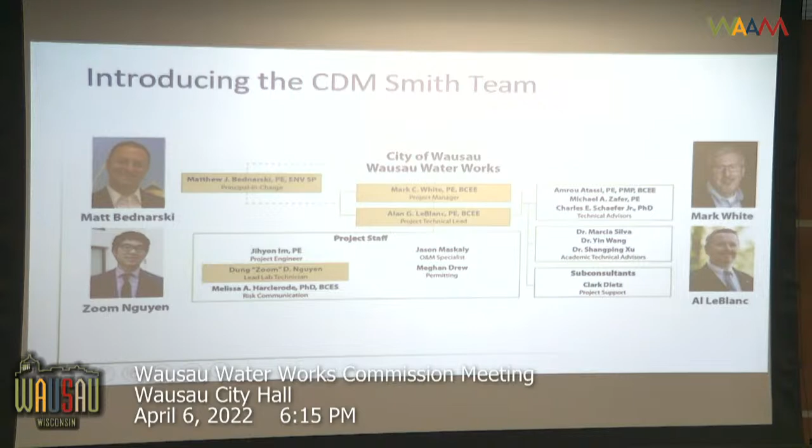What am I doing? This is actually the test here. I'm eating away at that 15 minutes here.

2022 is CDM Smith's 75th anniversary, and we grew up as a water firm working in water treatment, formed in 1947, and doing that from day one. We still do that. That makes up a big portion of our business today even. We've added many other things, but water is in our at our core and in our DNA.

I just wanted to point out that we have more than 100 staff in our region working on these projects, and that we've worked in dozens of communities in the Midwest and around the Great Lakes, including in Wausau.

So we're working in Wausau on your lead service line replacement program. We are a partner to Clark Dietz on that, who is on our team for this. And we are working on your corrosion control treatment study, which is integrally important to the PFAS study as well, as we need to make those water chemistries work together.

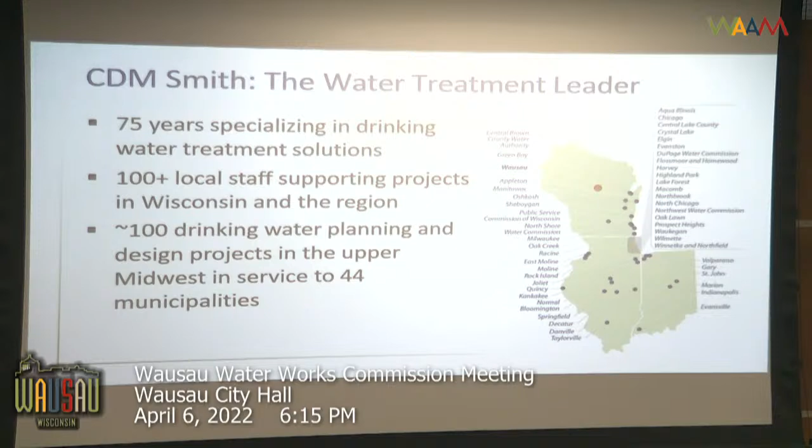Across the country, CDM Smith has almost 200 different PFAS projects, either water treatment or environmental projects, and we started working on these kinds of projects in 2007, prior to when it became an issue for drinking water utilities. It was more of an issue for our industrial clients across the country, and that's when we started working on these issues.

New England seems to be the heart of the starting point for the drinking water portion of this, and that is where our company is based. We're based in Boston, and many of the projects that you see on the map emanate there in New England. But as you can see, as states are creating those regulations, as we move west, we are working with those states as well.

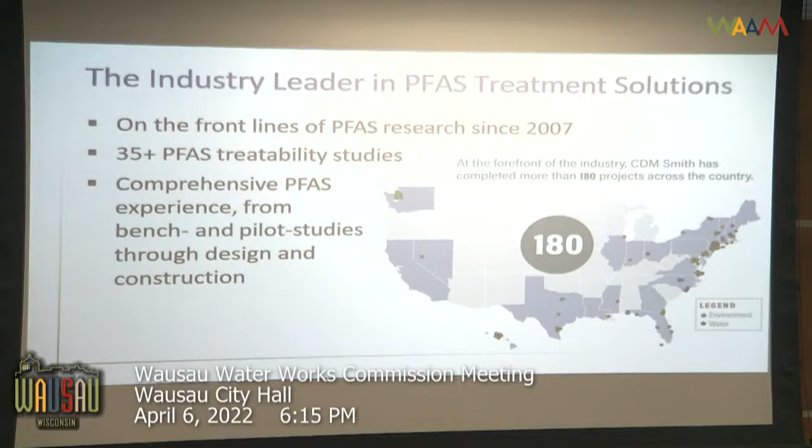So I'm going to turn it to Mark to go over some of the projects that we've worked on. All right, thank you. I'm just going to go through the next couple of slides, kind of present some of our experience and some projects that are similar to what you're experiencing.

First project here, it's in Massachusetts, and as Matt said, Massachusetts was one of the first states to come forward with regulating PFAS, and still has some of the most stringent PFAS regulations in the country. In this project in 2016, they found PFAS at elevated levels, 10 different compounds, over 300 parts per trillion. So CDM Smith was called in.

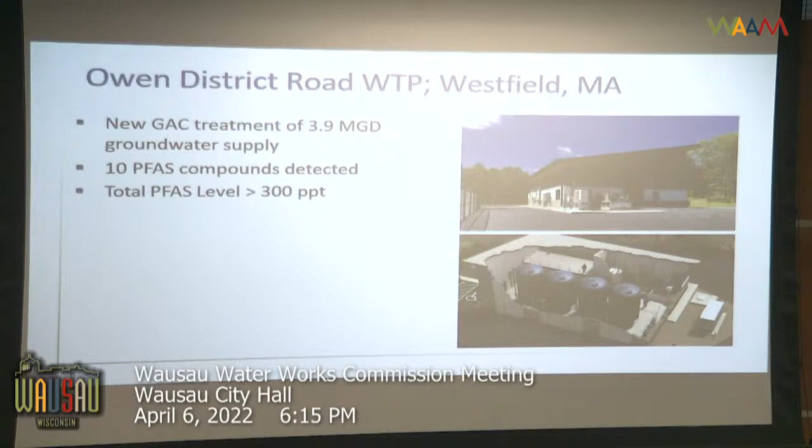We came out, kind of helped their facilities right next to an airport, and so we identified where the source was coming from, worked with them, took water samples and sent it to our laboratory, our treatability laboratory, so they were able to run side by side, small scale rapid column tests.

In such a way they could very quickly look at 2 or 3 different PFAS, or 2 or 3 different activated carbons to see which one is really best for this, because all carbons act a little bit differently, and each water is different. With that, we were able to see which are the carbons that work best, and then we were able to quickly design the new treatment facility, helped with construction phase services and startup and commissioning.

This went online in 2020. It treated over 400 million gallons have gone through the plant so far, and everything is coming out non-detect. This was the first full-scale potable drinking water treatment plant in Massachusetts.

We spent a lot of time working with regulators and trying to figure out what they were learning about PFAS, and trying to figure out how they were going to regulate this, and what type of analyses need to be done, and what type of monitoring needs to be done.

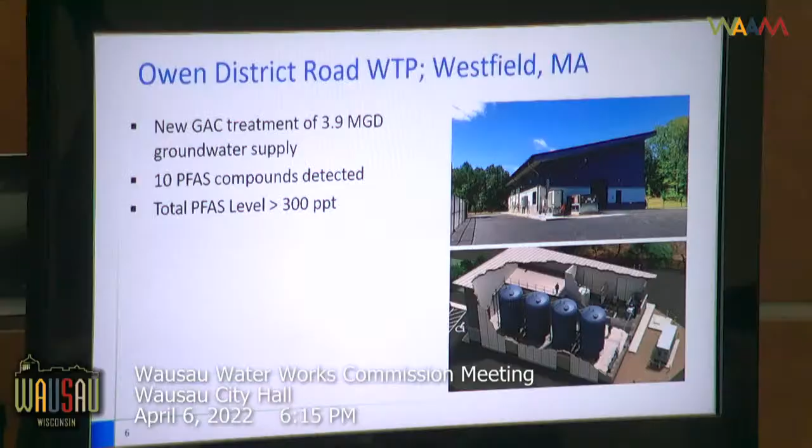Next project, not too far away, is in Ayer, Massachusetts. They identified PFAS also in 2016 at the Grove Pond facility. In that case, they had PFAS over 100 parts per trillion, with multiple contaminants.

So once again, we took samples, carboys of water, shipped them to our laboratory, who was then able to go through these treatability studies. In this case, we compared ion exchange as well, comparing different ion exchange resins and different carbon resins. With these small scale tests, you can get your results back very quickly.

They also looked at what happens if you put GAC and anion exchange in series, trying to figure out the best treatment for this facility. They found that ion exchange works best for this water, so CDM Smith designed the 2 MGD water plant, which went online in 2020, working closely with the state throughout the process. This is the first ion exchange PFAS treatment system in Massachusetts.

Then nearby, at Spectacle Pond, as the regulations kept going down, their levels were initially under the 70-part regulation Massachusetts first put forward, but then Massachusetts lowered that to 20 parts, so suddenly this facility was out of compliance. We've been working with them, and again it's on the same aquifer, but we shipped the water out for treatment studies, and in this case we found GAC actually worked better for this water. So you really need to look at each water individually. This project was designed and is a couple of months away from construction.

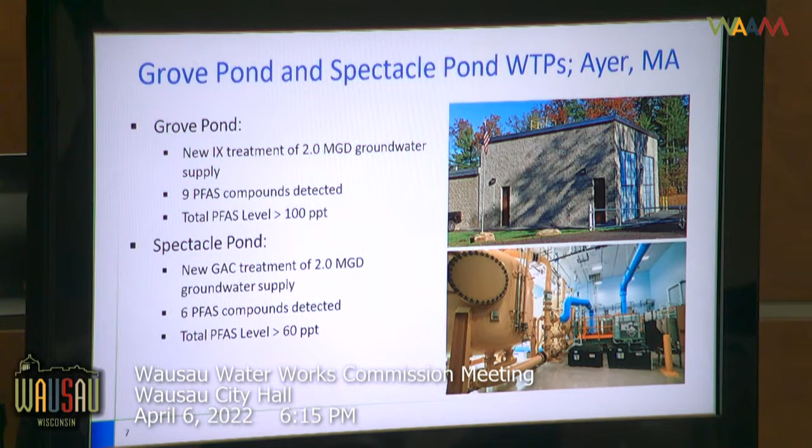Finally, just to touch on bench scale testing - Matt mentioned our laboratory, and Zoom's on the call, who kind of heads up our treatability studies. This lab has done over 35 treatment studies focused on drinking water, where we've been able to ship the water out there. In the top photo you see all these small columns on the wall, small rapid scale columns with media inside them.

Traditionally, this has been very useful for granular activated carbon. Over a couple of weeks, or several weeks, you can get results that would take months or over a year on a pilot scale. We can evaluate these, and we've actually shown and come up with methods where we can do the same thing with ion exchange.

So we can look at different ion exchange resins, different carbons, and how they react in series or together. Because it's in a laboratory setting, we can control for cross-contamination, making sure your results are reliable.

We need to look at not just your target contaminants - you can see there are 2 resins on the graph, and on the bottom are all the different PFAS species. Two of those, PFOA and PFOS, are showing zero concentration, so both resins met the regulatory requirements and would treat the water. But if we look at the non-regulated contaminants, resin 2 was doing much better.

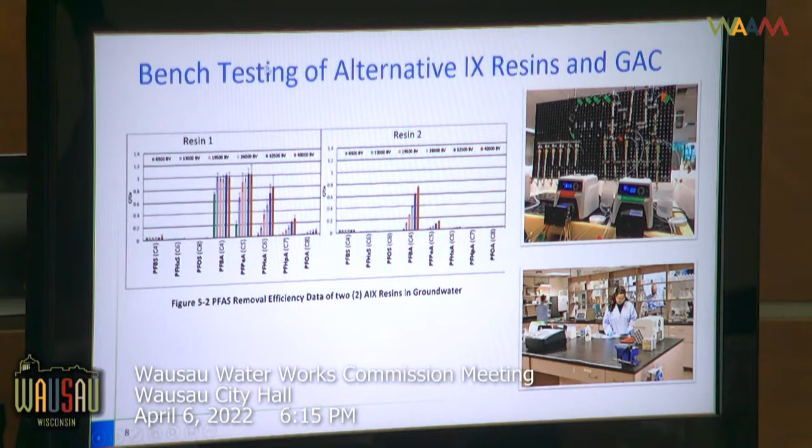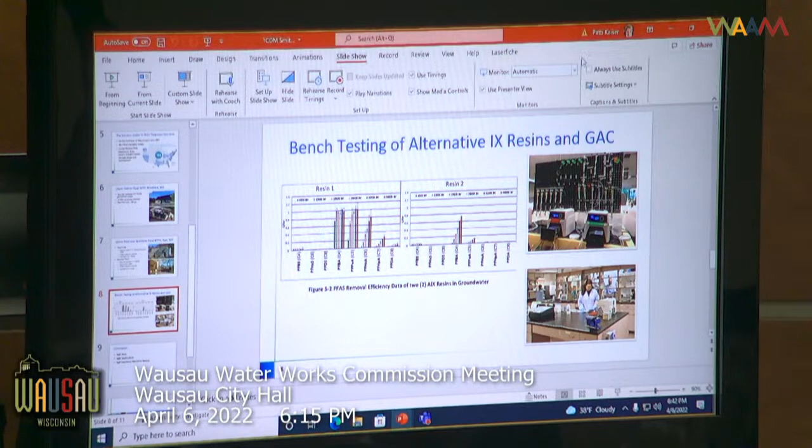Sure, Mark, and I think you're spot on. We're testing 40 plus waters from all across the country, some groundwater, some surface water, and we notice a lot of trends. Things like bulk contaminants, chloride, solvents, even at trace level, can impact GAC performance and longevity. And you mentioned the high organic content present at the site here, and we notice that high organic content, even just 1 to 3 milligrams per liter, can adversely impact both the resin and GAC performance and really longevity. So, doing some bench testing, what we always call 'penny on the dollar' type testing, can get you really good, reliable data within a very reasonable time frame. This testing really can take weeks instead of months to get good results.

Thanks, Mark. Thanks, Zoom. Just wanted to leave you in conclusion here that CDM Smith has pulled together the right team for this review project that you have put forward. One team member I failed to mention is our risk communications professional, Mel Harclerode. She is working on communicating risks on PFAS and lead services all across the country. I know that your communication with your public has been very transparent and out in front. It's very important to you, and that's very clear from everything I've seen over the last 4 months. As you move forward through that, we can help provide some more content for that as well.

As you heard from Mark, we have the right qualifications. We've been working on this since 2007 and continue to grow our experience and our resume in this field. And finally, we have the right experience relevant to Wausau, and again, that's really focused on water chemistry and the CCT study. Thank you.

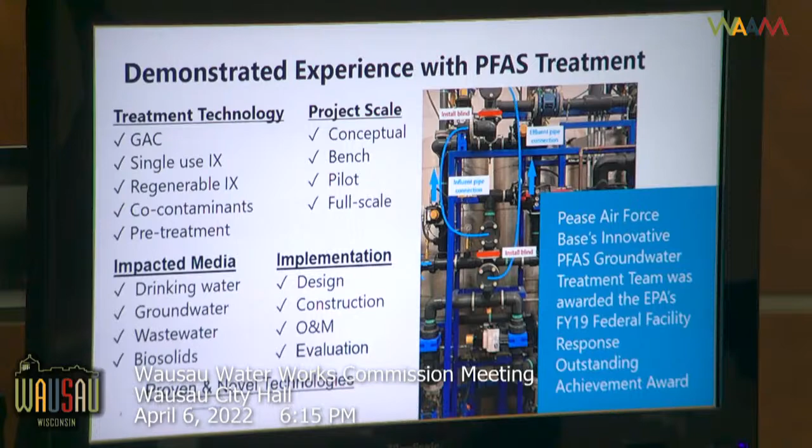As part of developing these specialized treatment systems, we look at treatability studies to help optimize these systems. Wood has 3 fully equipped treatability labs in San Diego, Atlanta, and Cambridge, Ontario. These labs help optimize treatment systems, not just at the front end when the system is being designed, but throughout the project lifecycle, evaluating new technologies like GAC and ion exchange.

One example project where we've used a treatability lab is a landfill project in central Michigan with PFAS contaminated groundwater. Our project team developed a full-scale treatment system there from the consulting and engineering side. We developed both bench and on-site column tests to expedite the design, then supported procurement and construction. It consists of 3 ion exchange vessels to treat the PFAS, plus an air stripper for VOCs on site. The team used treatability studies to optimize that system.

Wood is also involved in research and development within the PFAS world, with more than $3 million on contract right now to develop treatment and destruction technologies. Our team is very familiar with R&D, and we have a number of peer-reviewed articles that support the development of these treatment and destruction technologies.

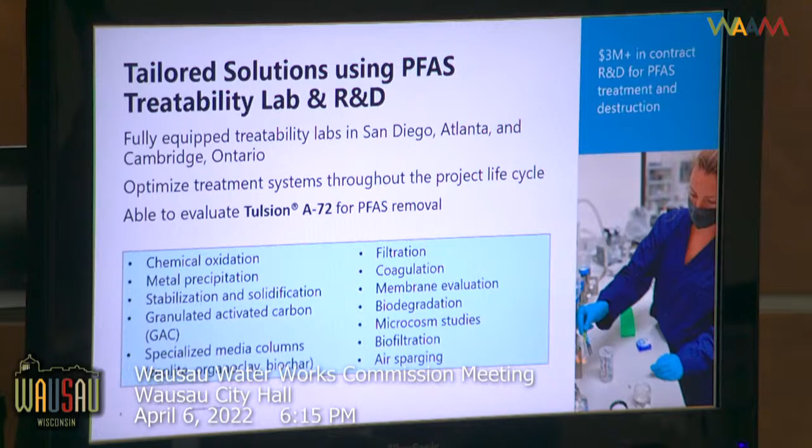As a leader in PFAS, Wood is always trying to look forward and anticipate what might come down the pike. We expect that PFAS destruction will become an important component. If we take a step back, treatment is really the idea of separating and concentrating PFAS out of source water and then destroying or disposing of that material.

We know that the US EPA's recent roadmap for PFAS states they plan to classify PFAS as a hazardous substance later this year. When that happens, costs for disposal are likely going to go up, and the logistics of handling that waste will also become a potential challenge. Our team recognizes that treatment systems as a whole are never static and will need to adapt and evolve to both the changing regulatory environment and the changing technologies as they advance and improve.

All right, so with that, I'm going to hand it over to Hannah, who's going to introduce the East Metro project in Minnesota, where we've provided strategic consulting to the state on their PFAS issues.

Thanks, Evan. That was a great summary of Wood's PFAS expertise. I just want to recognize the team here. Evan brings the Wisconsin perspective to our team, and we've got Dave here representing our global consulting expertise. I'm here to talk about one project that I think is a great example of how we've used that expertise.

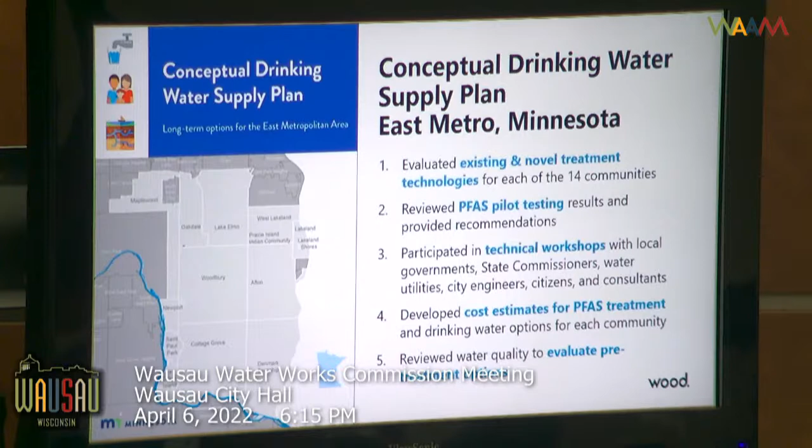Specifically in providing that technical advisor role: the state of Minnesota, for those unfamiliar with the situation, sued 3M company for contamination impacting 14 communities, shown on the map on the cover page of the Conceptual Drinking Water Supply Plan. We were brought in after the settlement was reached in 2018 for $850 million.

The state went ahead after that settlement and put together work groups. Those work groups met on a monthly basis. Do I need to pause? Are there technical difficulties again? Can you hear us? Okay, good. We don't know what's happening here.

So the state brought us in after those work groups had started meeting monthly because they recognized there was a need for a PFAS expert, and we already had experience with the state, so they brought us in that capacity.

We immediately began meeting with the communities and starting to develop the plan. What we brought to those 14 communities, about 170,000 residents in total across a large area of 150 square miles, was our role as not only PFAS experts but also in looking at a conceptual water supply system, taking into consideration all the different communities and what their water supplies currently look like and what they might look like in the future.

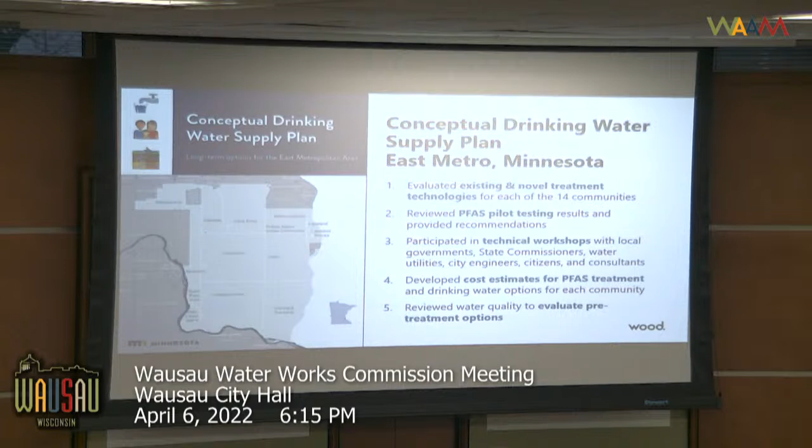So we did that technical legwork, and part of that also included reviewing technical components, such as some of the communities doing pilot studies as well. So we did review of those pilot studies and provided technical feedback to help make those the best that they could be.

We continue to engage with the communities after the plan. The plan was released last year, 2021, and since then we've been working with the state to review all the plans coming in and make sure that the funds are being used according to the plan that we put together.

I just wanted to emphasize that throughout that process, we've been working as a team within Wood, and I've been working personally with all of these experts throughout this process. I think one of the things is just having those experts accessible and ready to answer any questions that might come up. So hopefully that gives you a little bit of insight in how we can help the city of Wausau and provide that technical advisory and specific PFAS experience for you all.

And I'll turn it back to Evan. All right, well, thanks, Hannah. So that concludes our presentation. We do have some information after this with recent publications, some of our recent examples of work, but otherwise we're happy to take any questions that you might have on those or really anything related to our PFAS qualifications.

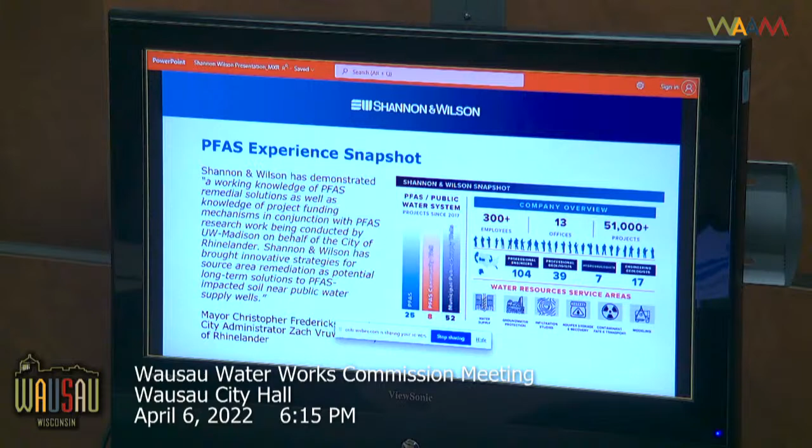Shannon and Wilson are also active members of the Wisconsin Rural Water Association. We have submitted a paper on PFAS community project management and planning for a presentation at the American Water Works Association Wisconsin Chapter's annual conference this September.

Our project approach is focused on the most critical parameter: the protection of human health, a basic fundamental concern that requires immediate attention and corrective action. We understand the importance of the City of Wausau and the Wausau Water Works' ability to provide safe drinking water to its residents. Shannon and Wilson recognizes the need for reducing and removing PFAS from the city water supply as an appropriate immediate response to the concentrations of PFAS detected in all 6 municipal water wells above DNR health advisory limits.

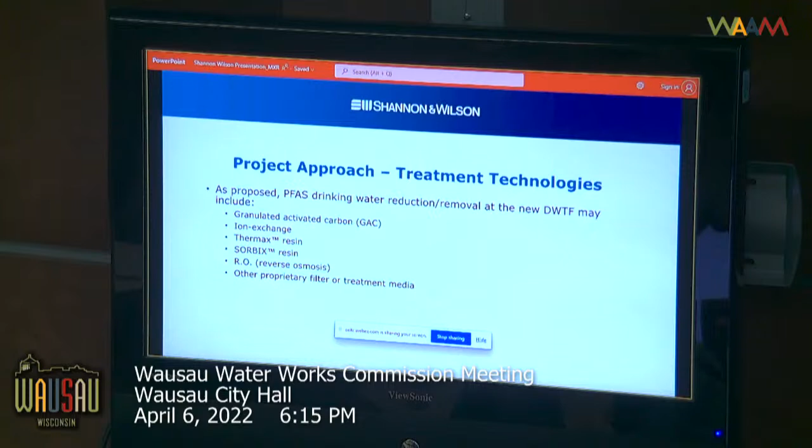As proposed, the drinking water treatments include a variety of existing and developing technologies, including granulated activated carbon (GAC), ion exchange, Thermax resin, Sorbix resin, reverse osmosis, and other proprietary filter or treatment media. That said, PFAS are hard to treat. PFAS are everywhere, with potential sources existing in groundwater, surface water, soil, and even in the air.

So as proposed, our project approach warrants a review of all treatment media and even more options that are available through a number of contractors that specialize in drinking water treatment systems. Because the new drinking water treatment facility is so far along in its construction stage, with an August 2022 proposed startup, it may be more cost effective to have existing engineering firms Donohue and Becher Hoppe contract directly with a drinking water treatment firm to complete the bench scale testing and add treatment trains to achieve the initial goals of PFAS reduction at the facility. As part of our project management, Shannon Wilson can facilitate the water treatment contractor selection process.

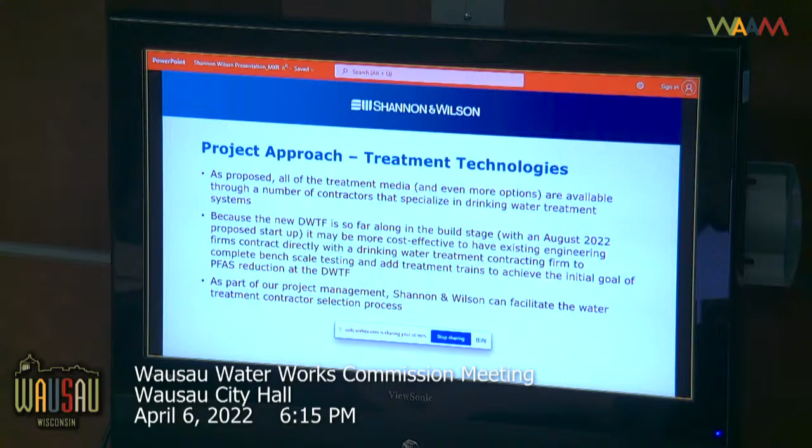Shannon Wilson's approach to the City of Wausau's PFAS drinking water issue is a long-term solution to Wausau's water problems, involving defining the nature and extent of PFAS impacts in soil and groundwater, as well as devising a well-field protection strategy. It is not economically feasible to treat Wausau drinking water for PFAS into perpetuity.

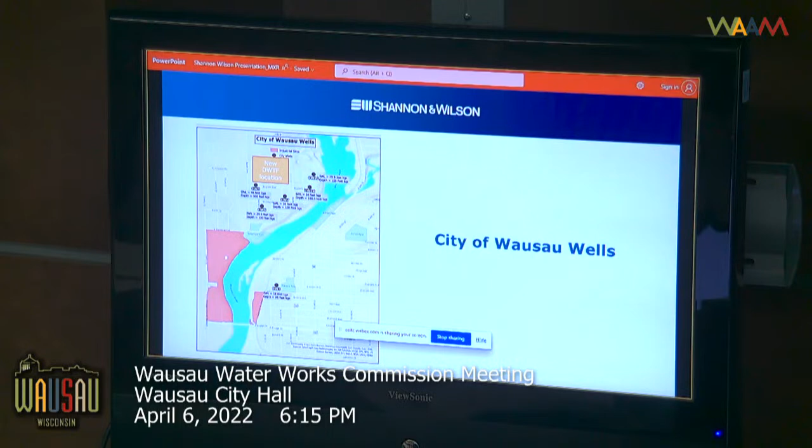This map shows the locations of the 6 wells impacted by PFAS. We've also provided a summary table identifying the well locations, the pump capacity, volume extracted in 2021, dates installed, total depth, the geology where the water is coming from, the source water itself, and the results of the PFAS sampling completed in 2019 and 2022.

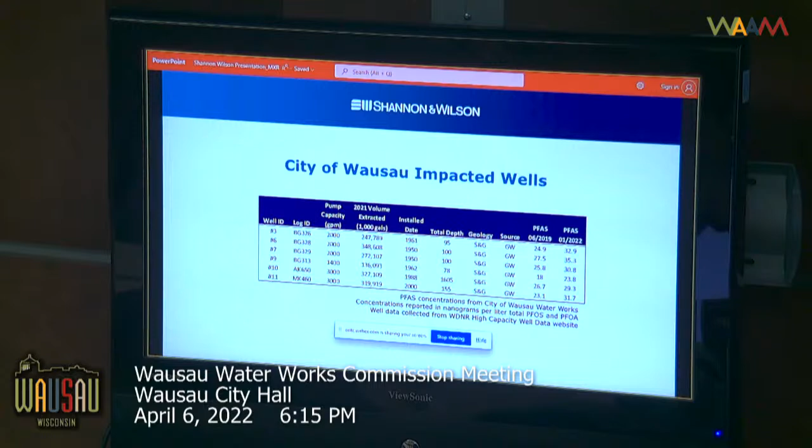As a Wisconsin company, Shannon Wilson has partnered and funded PFAS research with the University of Wisconsin-Madison's Environmental Engineering Department to investigate the closure of 2 of the 5 City of Rhinelander municipal wells due to EPA health advisory drinking water exceedances. These wells were located near possible sources of PFAS contamination, including firefighting foam, municipal sludge management areas, and solid waste landfills.

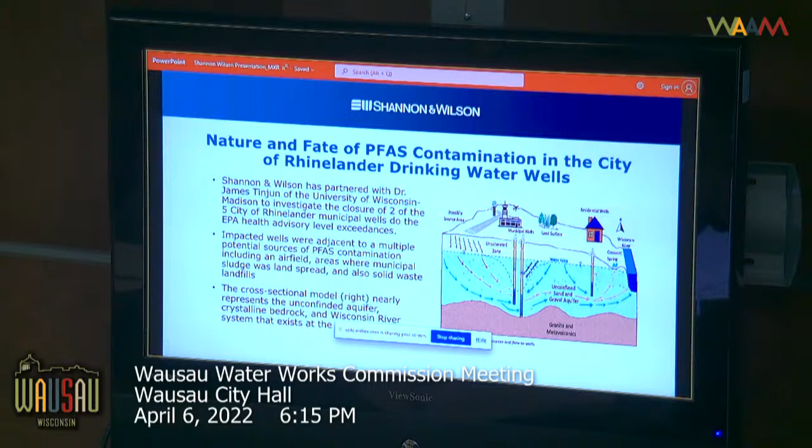Coincidentally, with the exception of the suspected source areas, the cross-sectional model provided here is similar to the well field configuration for the City of Wausau: a highly permeable sand and gravel aquifer, shallow high-capacity wells, crystalline bedrock, and a hydraulic connection to the Wisconsin River. Our field research completed for the City of Rhinelander includes sampling PFAS in soil and groundwater, geophysical investigations used to evaluate the aquifer characteristics, and PFAS fingerprinting to analyze and link PFAS sources to PFAS in groundwater.

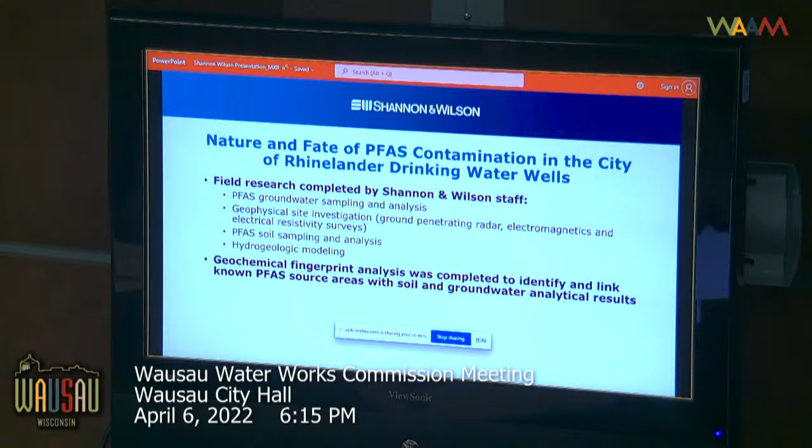At this time, I'd like to introduce Kristen Freiburger, again, senior chemist and PFAS subject expert, to talk about some of her project work.

As Mark mentioned, my name is Kristen Freiburger. I am the environmental group lead in our Fairbanks, Alaska office, and I have personally been working on PFAS projects for over 8 years. Shannon Wilson has been working on PFAS projects with several different clients throughout the years, but our largest set of projects is on a 15-year contract that we won with the Department of Transportation here in Alaska. As part of that contract, we are investigating 30 different airports where AFFF has been used. I'm going to highlight a couple of those projects in these next slides.

One site that is part of our work with DOT is the Fairbanks International Airport. Our client detected PFAS in several wells on site during an investigation, and since the groundwater in this area is known to flow towards private wells, DOT contacted Shannon and Wilson, and we quickly mobilized to collect samples from the private wells near this airport.

This map shows the results of those samples. Red indicates locations where PFAS concentrations exceed the EPA LHA, or 70 parts per trillion for PFOS and PFOA combined. These homes have since been hooked up to a municipal water system as a long-term water solution for their home needs.

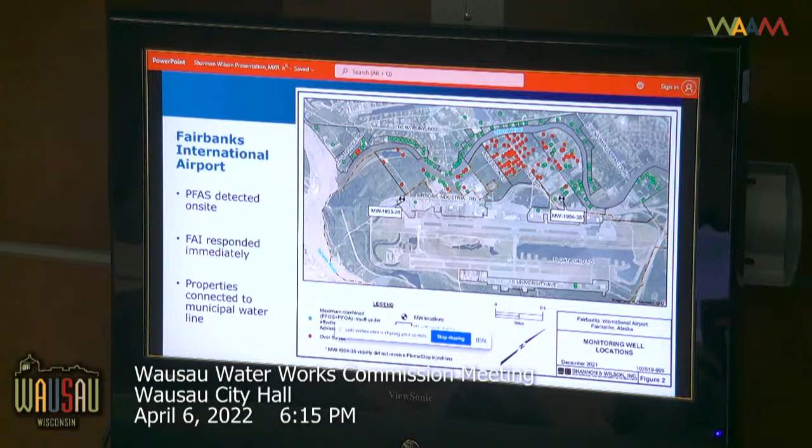At the Fairbanks International Airport, we also completed a pilot study to investigate the effectiveness of PlumeStop for sequestering PFAS. PlumeStop is a colloidal activated carbon that's injected into the ground. We did this in an area known to have high levels of PFAS contamination, and the material was formulated to sequester 5 PFAS compounds: PFOS, PFOA, PFHpA, PFHxS, and PFNA. This work was completed in partnership with our client, DOT, and also the manufacturer, Regenesis.

Ongoing monitoring has occurred for almost 2 years, and during our last sampling event at the end of that 2-year period, the 5 PFAS compounds the material was designed for were not detected. We're currently investigating how this technology can be used at several of our sites that are part of our DOT contract.

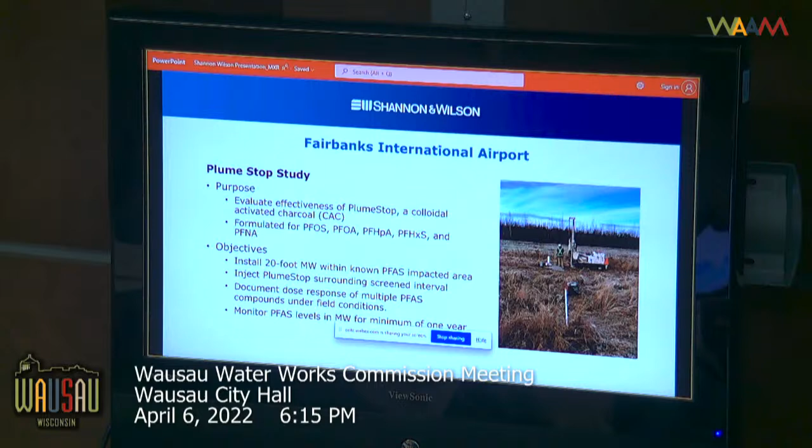Another airport that is part of our DOT contract is the Gustavus Airport, located in southeast Alaska. Our project kicked off with a well-attended public meeting in 2018. At that meeting, we informed the public about the contamination in the area and scheduled appointments. This project has also included installation of a point of entry treatment system at the Gustavus Inn.

That system uses GAC, and after two years of monitoring, PFAS are still not detected in that system. It also includes the removal of arsenic, which remains non-detected to date as well. We are currently investigating additional remedial options for soil and groundwater contamination in this area, and connecting homes to rain catchment cisterns, and also installing a public well for supplemental purposes for those cisterns during dry periods.

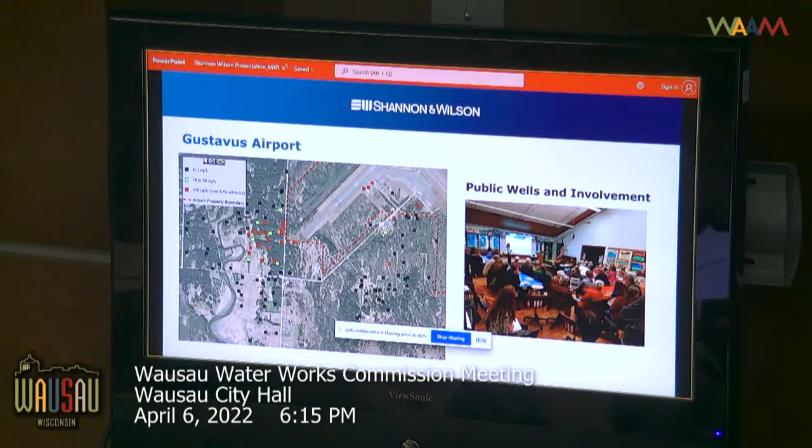As we move forward, Shannon and Wilson have identified a number of project funding mechanisms available for the investigation and remediation of PFAS in soil and groundwater, as well as a number of grants and loans available for infrastructure improvements for water systems impacted by PFAS. As of March 18th at the Wisconsin Rural Water Association Conference, the DNR is still waiting for the EPA to determine the vehicle for providing the funds for these projects.

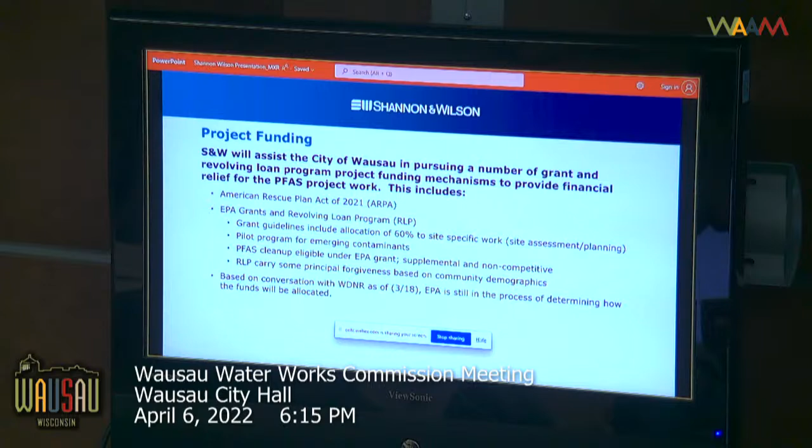ORIN Technologies is our teaming partner, and they have experience using a variety of chemical reagents, biological, organic, and inorganic, to break down PFAS in soil, groundwater, sludge, and even in firefighting foam, which is the major source of PFAS impacts to soil and groundwater. ORIN is currently working with the DNR on a number of pilot studies at a major airport in south central Wisconsin. ORIN would be providing these same technologies to the city of Wausau's PFAS projects.

As an approach to addressing the immediate health and safety concerns for the city of Wausau, Shannon Wilson recommends that the city of Wausau, the water department, Becher-Hoppe, and Donohue, with the assistance of Shannon and Wilson, identify a specialized water treatment contractor to provide the appropriate media and treatment trains to achieve the goals of providing safe drinking water to their constituents. Services completed by the selected drinking water specialists would include an evaluation of the available treatment technologies and contingency planning based on future potential EPA health advisory standards.

Concurrent with the upgrades to the drinking water treatment facility for PFAS reduction and removal, Shannon and Wilson proposes to evaluate and inspect the existing wells, complete a well field assessment including groundwater capture modeling to determine source areas impacting the existing well field, assess considerations for well field development including well relocation, exploring non-PFAS impacted areas for sources of community water, and provide remedial solutions that have been successful at other locations in reducing PFAS in soil and groundwater before the groundwater gets to the drinking water treatment facility.

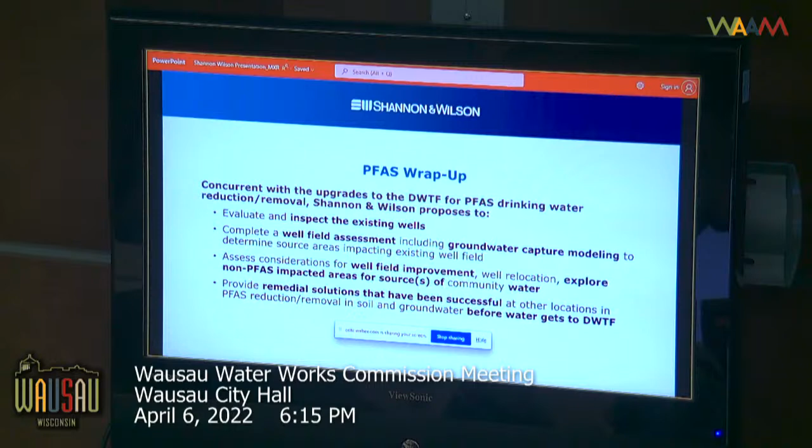While the city of Wausau and the water treatment facility have a desire to immediately address the public water system, the existence of private wells used by the community outside of the service area may be another consideration. It would be important for the city to provide clean water for the majority of Wausau residents outside of the current service area, which would add additional ratepayers into the system. Expanding and seeking other sources of community water outside of the current well field may also provide the capacity needed for this expansion, and well field expansion may also be used to blend down PFAS impacted water at concentrations below regulatory health advisory standards. Funding is also anticipated for these system upgrades and assessments.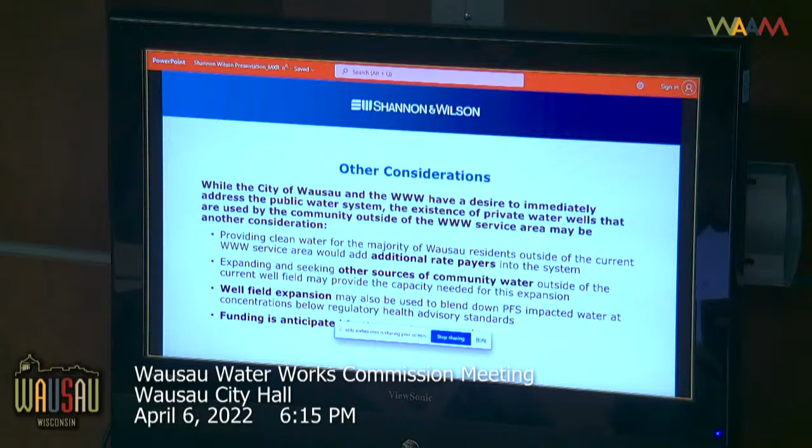We appreciate the time and your consideration, and look forward to your decision on moving forward with this project. Thank you.

Okay, so I'm unmuted for some questions and answers if you have questions for me. They're completely virtual, right? But they're not. All right, thank you. I guess we are moving on to... the life cycle cost? So I think we're going to have to send them the questions via email since this was a virtual presentation, or a pre-recorded presentation.

Life cycle question for the treatment systems, that's for the service providers that provide the treatment trains and some of the other consultants that will be presenting their technologies today. Our proposal is really about wellhead protection and making sure that the water you're bringing into the system isn't impacted to begin with. So we decided to take a bit of a different approach, which was actually part of the RFP response.

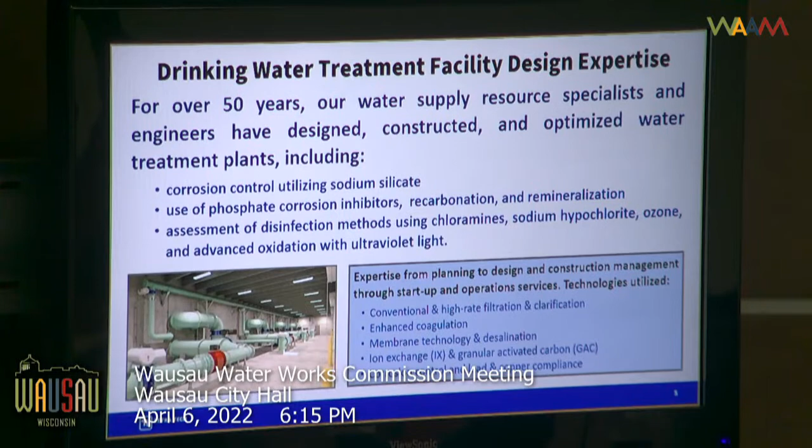And that's due in part to the long history of our drinking water treatment facility design expertise, which includes the traditional considerations of disinfection methods as well as corrosion control and other treatment methods. And that goes for wastewater as well. We have an extensive history of wastewater treatment design.

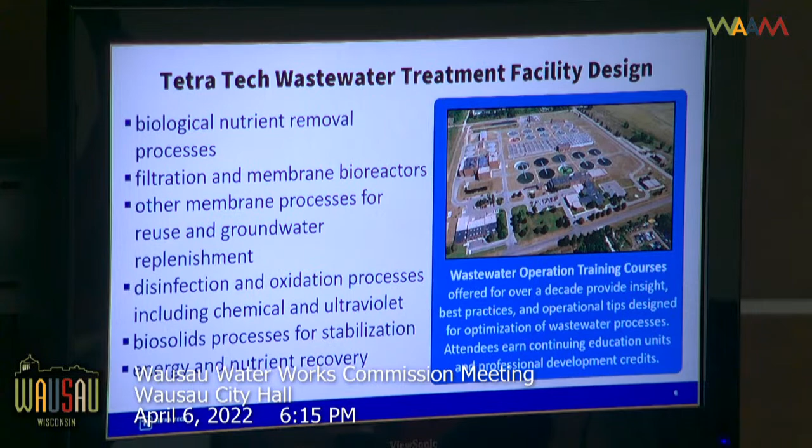One noteworthy point in that regard is that for over 10 years, we've offered wastewater operator training courses for which attendees can earn continuing education units and professional credits. I'm going to quickly go through some slides showing our projects across the globe and through the U.S.

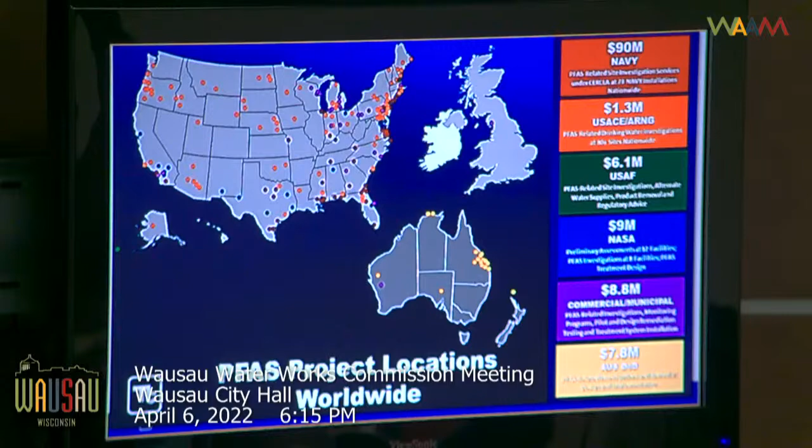The first slide shows projects across the globe, including Australia, which is the place where a lot of innovation first started with PFAS treatment. And then the U.S. map shows a lot of our projects that were completed for DoD clients, but then also commercial, municipal, and industrial clients as well. They involve partnerships with evaluation of treatment technologies with the DoD and also universities.

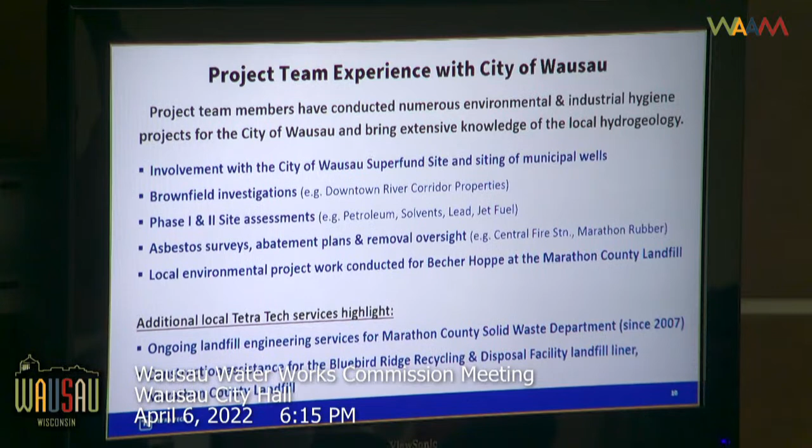Thanks. Might have to erase this a little bit. All right, good job, Marshall. All right, yeah, I'm Jamie Dixon with Tetra Tech.

We know the important thing here is you guys got to protect your drinking water up front. So we looked at only NSF certified type technologies that have been approved by other places for drinking water, which include reverse osmosis, granular activated carbon, which everyone's talked about, and ion exchange. So we're really focused on those, and we've done pilot studies and other things in the past.

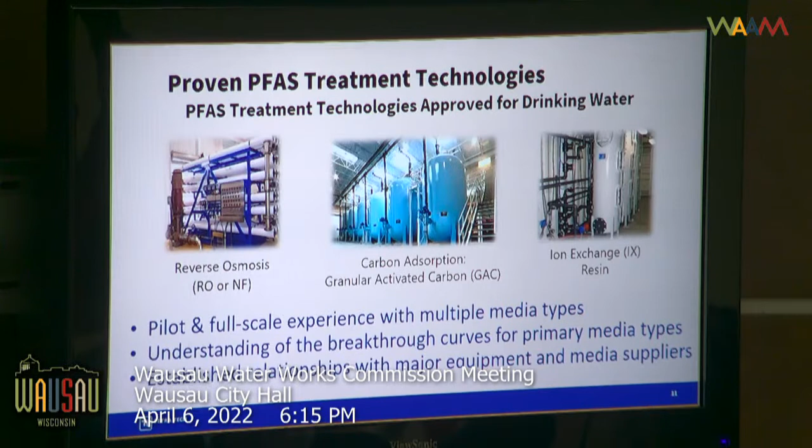I wanted to go through this and get some ideas of what's what, so that you can see. I've reviewed your system that I could find available online, and your new water treatment plant that you built is about 4.8 million gallons per day, or about 3,330 gallons a minute. The max peak stuff is about 9 million gallons per day, which is about 6,250 gallons per minute. So this range of system flow rates we need to deal with would be in that range.

You've got the TOC and iron manganese issues. You've got wells 3 and 6, which we've talked about earlier, that have impacts with VOCs. Even though they're below the MCLs, they're still above the cleanup criteria the last I looked. So those need to be maintained and operated, and I understand they operate one at a time so that there's always a net draw from those areas. The remaining wells are about 2,230 to 5,150 gallons a minute, depending on the configuration to meet those peak flows.

So ideally, based on all the stuff we looked at, the thing would be to stop the PFAS from getting into the new treatment plant, since it's not contaminated now, and we wouldn't want to contaminate it to start with. So what we've looked through, we identified it would be great to put a pretreatment in, and where would make the most sense to do that.

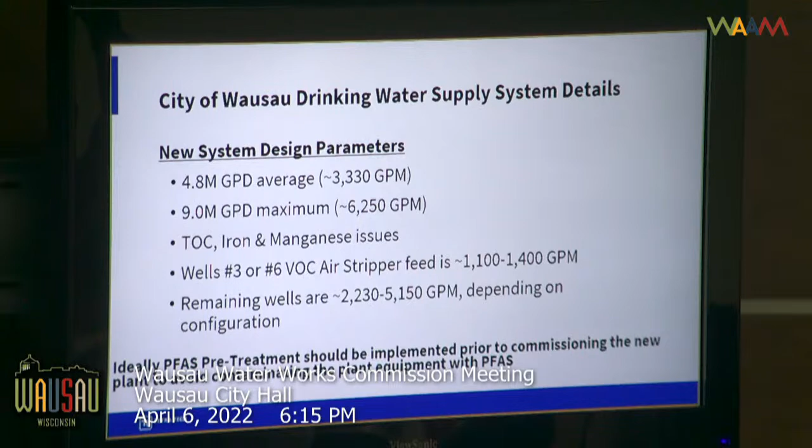Looking at your publicly available documents, we find you've got 3 and 6 that are feeding to the air strippers, which are being built there right now for your pretreatment for wells 3 and 6. And that's a separate manifold of 18-inch ductile iron versus the 30-inch ductile iron coming in from the remaining wells. So since you have those wells in that place right on the front end of your plant, we might have some footprint where we could put a pretreatment system before we hit the actual plant and start to contaminate it.

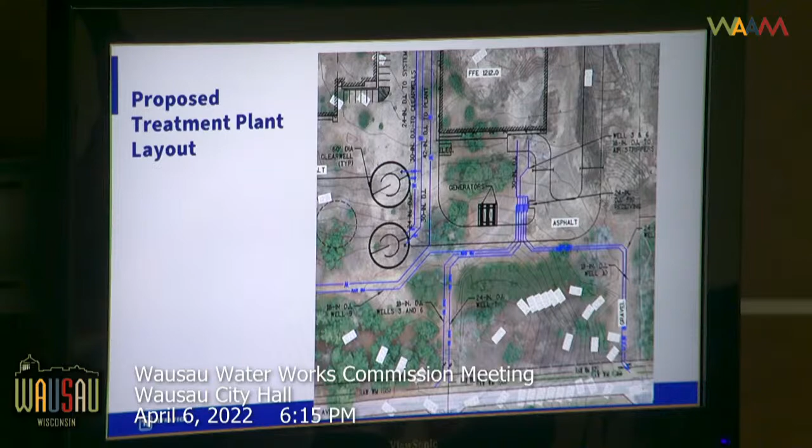The reason I'm really concerned about that is you have a lot of things in it. The sludge is going to go someplace. You're going to have PFAS in the sludge, which was mentioned before. On top of it, your filters have anthracite, which is a carbon. It's going to load up on that, and it'll be released once you start cleaning it. So you've got issues on the back end and the front end. I think the best solution we see based on the pilot output is to pre-treat it.

So let me just go through a couple of these technologies quickly. Reverse osmosis, high pressure through a membrane, filters out all the PFAS, it concentrates in the brine, and you got to dispose of the brines there. We still have the same issue we have other places. We've done this at a lot of Air National Guard bases, smaller communities. They're pretty cost effective for small units, but probably too much for this size, even though it's been done other places, but I think it's not the option we want to look at.

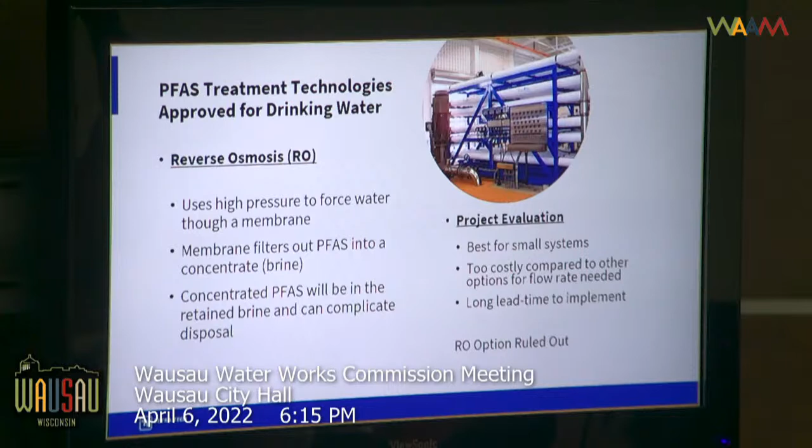Then granular activated carbon was the first on the scene that was used a lot of places. It has a very large empty bed contact time to meet the same removal proficiencies that you have for resin. Therefore, you have to have very large vessels. You need a huge footprint, and it's usually about 3 times the size of an ion exchange option. So double to triple the footprint, large capital investment because the size of the vessels is so much bigger.

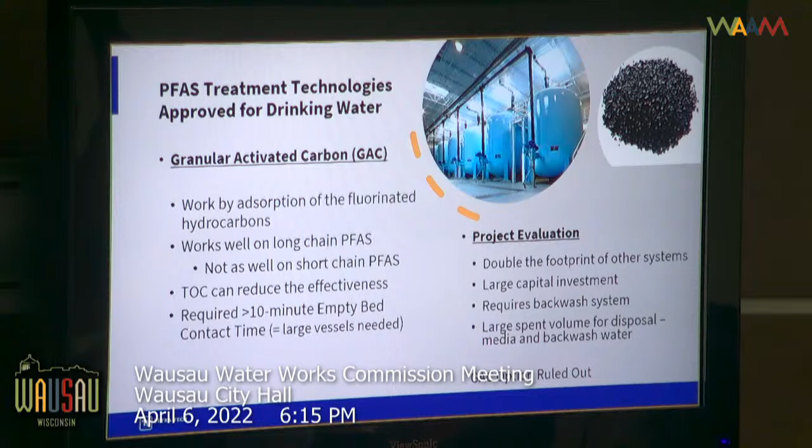GAC requires a backwash system because the media tends to plug up, and if you're backwashing it, there's another source of PFAS coming off the GAC that you have to deal with. There's also large media volume spent for disposal, so if you have to haul it out west, the larger the volume, the more it costs. That tends to be an issue, so we ruled out GAC as an option based on the pilot study results.

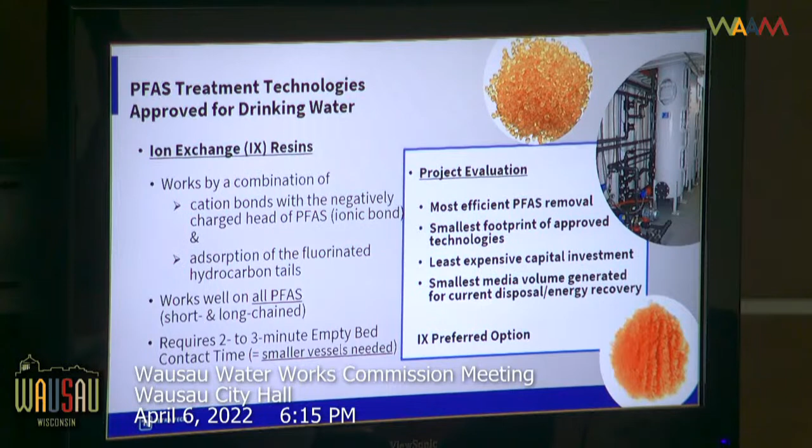So then we have ion exchange, which everyone has talked about. There's a couple different types and resins. We've gone through a couple evaluations, and you're running a Purex from ECT2 right now on your pilot study. That type of stuff seems like it would work based on discussions with them and the chemistry we see now, but until you actually test it, we won't know all the details. It usually has a 2 to 3 minute empty bed contact time, which means smaller vessels, smaller footprint, easier to treat. It's also the least expensive capital investment up front and the smallest media volume generated for either energy recovery or disposal. I'll talk about energy recovery later. So this is my preferred option based on a preliminary evaluation.

We have a site in Orange County, California that we put in for 5 months. We actually went from design to build, installation, and operations. The system consists of ion exchange like this with vessels from Evoqua, which I understand have come here and talked with you guys. The system has those in our current design. Basically, those vessels can be used for GAC carbon, or they can be used for resin, or any type of resin media we want to use. So it's a pretty flexible system.

We think the size we have there, which is for 2 wells, up to 3,000 gallons a minute peak, is a good size for a couple modular systems to put in the front of your site. If we've got the ones going to the air stripper, that's separate, at 1,100 to 1,400 gallons a minute. We need to put one system for those because they're separate and going to a different discharge location. Then for the PFAS treatment of the remaining wells, they might have 1 or 2 of the additional train systems, which I'll show you in a minute.

This is one we installed in Orange County, California. Basically you see this, you've got resin vessels. They're in a lead-lag configuration, which means you can sample between them and ensure non-detect water gets to your system on the back end. It also has 2 in series, so to change one out, you can put the other in service. It also allows you to do short-term dual train parallel operations to get up to 3,000 gallons a minute, giving you flexibility during operations when you have a higher peak demand.

This has a filtration system. This one actually has corrosion control and chlorination. It goes right into the water main from these 2 wells, so it's separate from yours. Yours already has a system on the back end, so we just need to do the pre-treatment part. There's also booster pumps, so if necessary to get additional head loss, those could be added in where they run by themselves, or used if necessary based on the conditions of your plant.

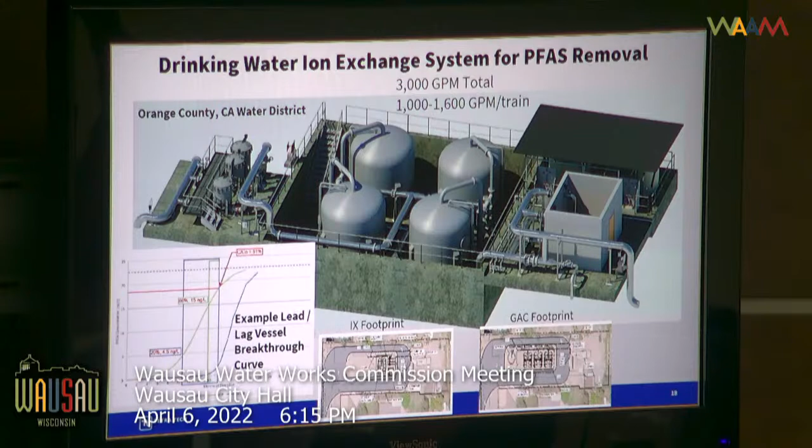As was mentioned before, the disposal options are pretty limited right now. There's potential for incineration, which can't be done for DOD sites, but municipal sites are still accessible. If you get the temperature high enough, you destroy the PFAS, and that could be used for energy recovery, like some incinerators that use it for power generation or cogeneration. That might be an option. The other option is landfill in a dry climate, which means hauling out west. So if we're looking at that option, we're talking smaller volumes and smaller hauls, which would be less expensive to haul and dispose of.

We've also done some evaluations of liquid waste acceptance. It doesn't apply to this directly, but if we were looking at other things like your biosolids or some other back end, we've got a couple vendors we've contacted and actually got acceptance of waste with PFAS in it before, so they're listed.

So what can Tetra Tech do for you? Well, we basically have a lot of experience. We've been installing systems like this, up to 20 million gallons a day out in California area. The criteria there for PFOS and PFOA are like 6.5 and 5.1 out in California, so well below your 20. That's a positive. It's been operational, and everything's been working successful at non-detect levels, and we think that's a good choice for your system.

We also have done quick regulatory approval. We have designs on the shelf with this equipment that we could streamline the design process. Discussing it with our vendors, ECT2 and the other one we've dealt with is Evoqua. Evoqua might actually have these vessels handy where it could be done in a relatively short term, and you might be able to still meet your August or September startup deadline of your water treatment plant. So it's a big positive.

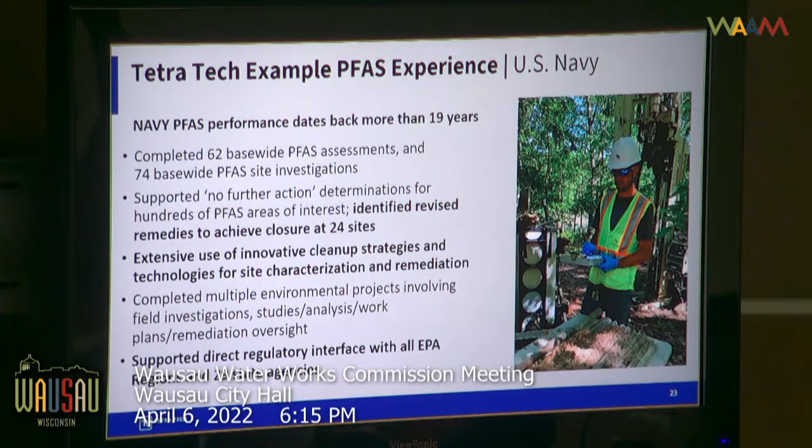We've been working with the DOD, and especially the Navy, which is first to the curve on dealing with the PFAS issue, some 19 years. So our DOD relationships is how we've been working so long in this field. We have a lot of experts that we can tap in if needed. We also provide PFAS fate and transport modeling and other things in training and that type of stuff.

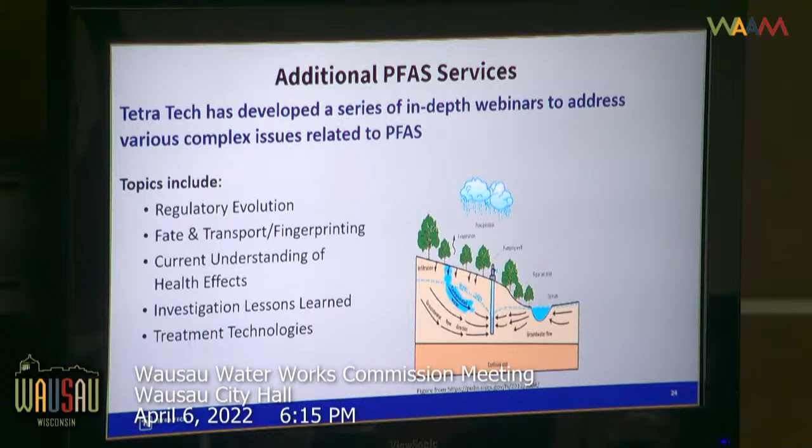So we don't need to do any more. Basically, that's our presentation. I was trying to keep it brief. So hopefully, if you have any questions, let me know.

I know that Robinson probably wants to ask his question about your life cycle costs.

Yeah, so basically thinking the resin being the lowest potential disposal. Now, in reality, once you get this implemented and you're safe on your drinking water side, we want to look, like other people had mentioned, at ways to minimize it coming into your system to reduce those operating costs over time, like an in situ remedy, which doesn't have to be NSF certified at that point. So then when it's getting to the wells, you could pre-treat it and maybe minimize your waste disposal, and your resin will last longer. That's one of the options we're looking at.

The other thing is the resin itself being smaller in volume, and you could send it out for energy recovery, because it has a good fuel value, since it's like plastic. So it burns really well for a regeneration or cogeneration facility that might take it for generating electricity. So we need to look at all those evaluations and see what the best cost option is.

But compared to carbon, the volume doesn't last as long. The bed volumes only last about 50,000 bed volumes versus 100,000 to 150,000 for resin. You're going to have a lot less volume, and it's going to be disposed of much less expensively because there's less volume that has to be hauled long distances.

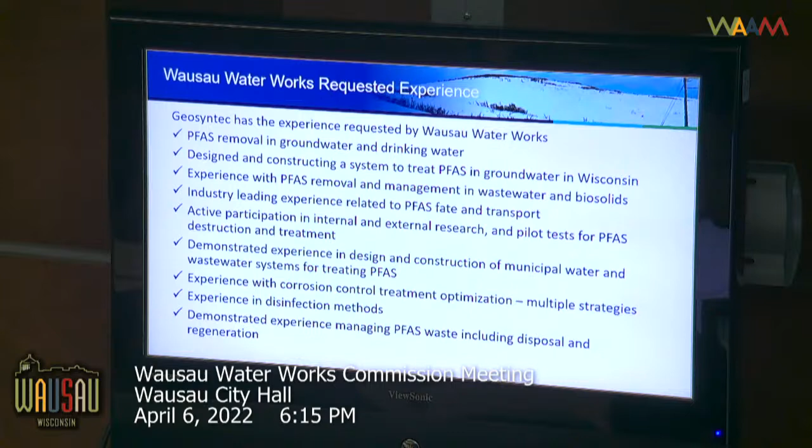And we team with tens of universities and think tanks to help develop these destruction technologies and optimize treatment technologies. The whole purpose of this is to help ensure that our clients not only are using the most cutting edge technologies, but the intent is to help them reduce their long-term operating costs and the waste management costs, as many people have talked about. We have firsthand experience that that's where the money is really going to be, the carbon and resin usage. So making sure the technologies are there to reduce that long-term cost is very important.

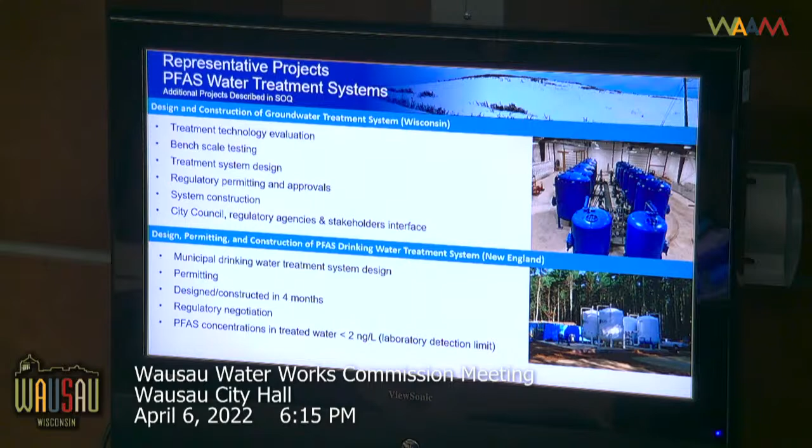So in summary, Geosyntec has experience designing and constructing very high-profile PFAS treatment systems in Wisconsin. We have a proven track record of implementing very effective and low-cost solutions with respect to PFAS. We have experts in PFAS management strategies and treatment technologies and continue to push the envelope with respect to these technologies.

We have a broad understanding of the PFAS big picture, including the regulatory strategies, where the regulatory environment is going, risk assessments, and making sure our clients stay in compliance. And we have extensive experience completing similar scopes of work, delivering cost-effective, fast-paced, and state-driven solutions related to PFAS.

And with that, I'll go ahead and turn it over to Baji, and he can talk a little bit more about what we've done here in Wisconsin and our experience with pre-treatment.

Sure. So as has been previously brought up, there's a lot of concern about the life cycle costs and optimization of the treatment system and pre-treatment. The Wisconsin project that we're currently constructing is an excellent example of exactly that aspect that we focused on.

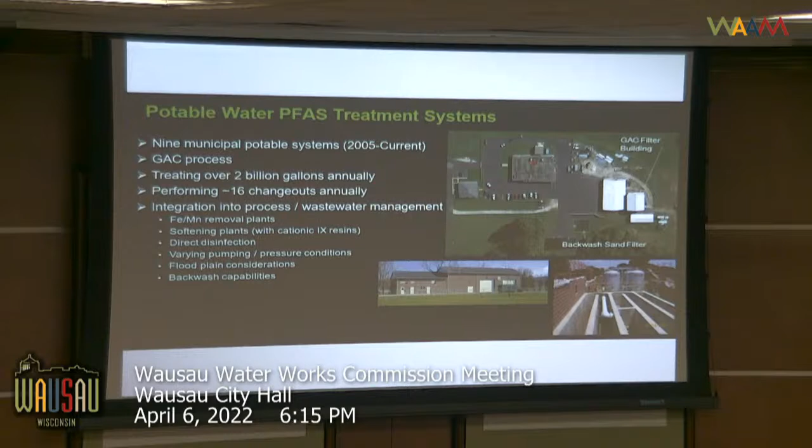Some specific sites - this one's interesting because it's 9 wells, treated at the various well sites. They have various raw water concerns, including iron and manganese removal, softening, and of course disinfection. The interesting thing about these sites was each had a different PFAS concentration, so they all needed different GAC media lives. We looked at ways to reduce the life cycle cost by managing some of the changeouts. AECOM has very good relationships with vendors, and sometimes works with them on changeout frequencies as well as long-term cost strategies to reduce costs for our clients.

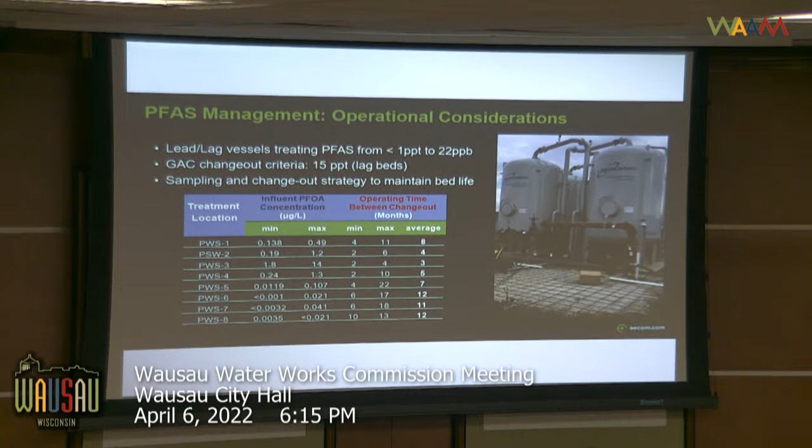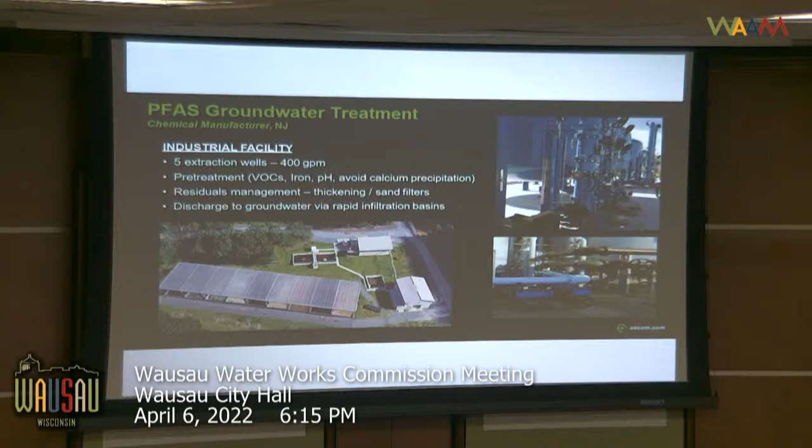The next project in New Jersey has 5 extraction wells. This one's also very interesting, another challenging raw water source with iron and pH issues as well as VOCs. In this case there was pH treatment to avoid water quality issues.

This is just another, there we go.

One item that happened was the operators had decided to turn off the pH treatment after startup. That resulted in fouling of the GAC. AECOM prides ourselves in our design of making sure that we will look at the water quality and make sure it's stable so you don't end up with water quality issues. Making sure water quality is stable coming into the process and leaving the process is pretty critical so you don't end up with these sorts of problems. So pH treatment, of course, here you can see that it was necessary, and when they turned it off, there was problems.

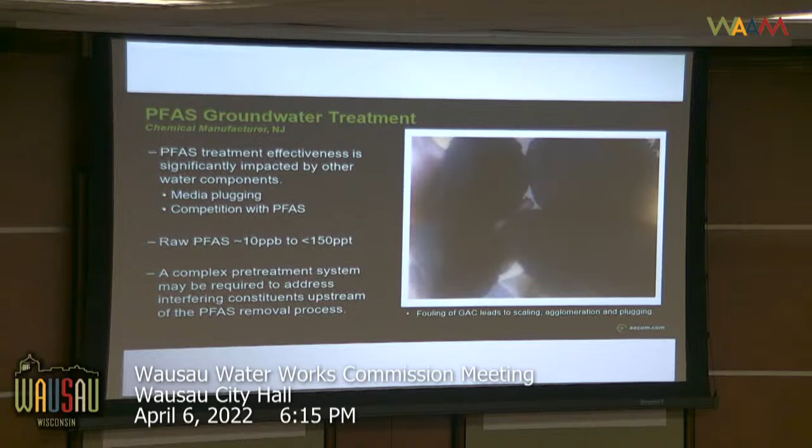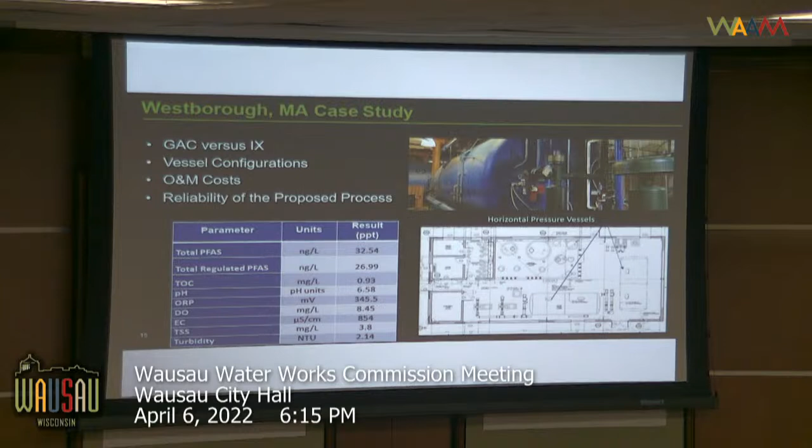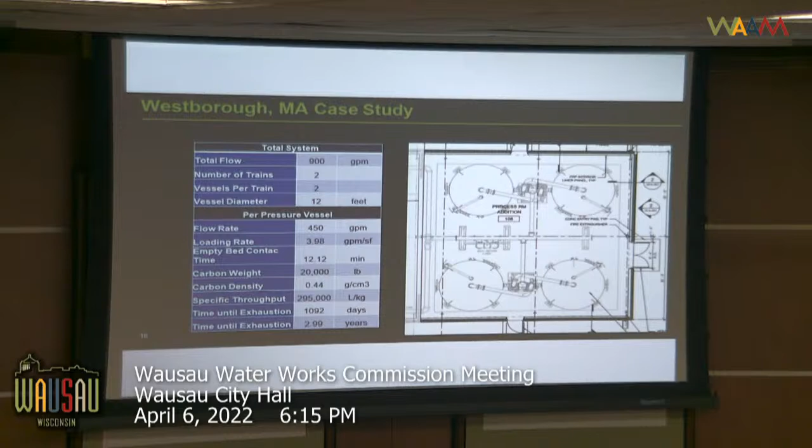Continuing on to the Massachusetts case study, the interesting thing about this is that we looked to use existing equipment. The existing equipment was horizontal pressure filters. Unfortunately, they were not usable because of the distribution issues with trying to get the right distribution and making sure that we're going to get good quality performance. So they ended up doing an expansion for that project. Again, just some costs available to you so you can look and see some of the history at some other sites.

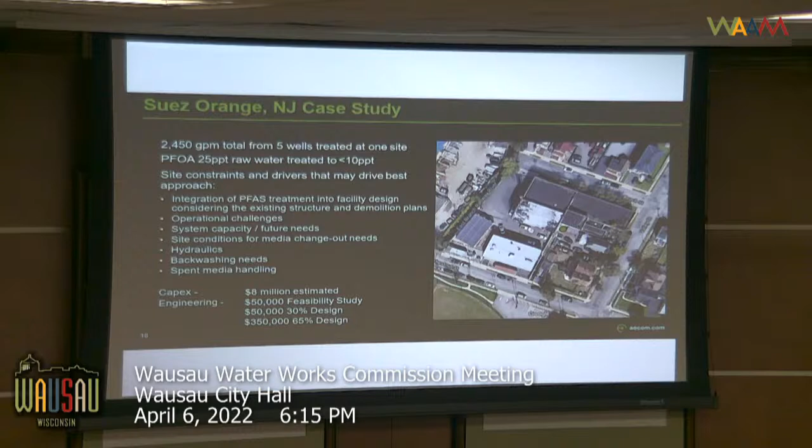For New Jersey, this project had 5 wells coming to a single source. The interesting thing about this project is they started with ion exchange treatment as the emergency treatment process because they didn't have time to get GAC vessels in there and get GAC installed. Now, they're not going to stick with ion exchange long-term because the cost for ion exchange long-term is much more expensive. Ion exchange media is very expensive to replace, and the GAC is a lot less.

So they did a very significant alternatives analysis. They looked at both cost, which would be capital as well as life cycle cost analysis, as well as other non-cost factors, including constructability and plant process operations.

Part of the alternative process and what you can set up for alternatives, examples would be that equipment sizes are kind of set. So if you have 2 pieces of equipment that were going to solve your problem, what happens if you go up a size? Or if you had a third one? Do you get better performance? How much better performance? And is that better performance worth the additional cost? Those are the types of things that we'd like to look at with our alternatives analysis.

Is there some sort of benefit to perhaps increasing those sizes just a bit as far as long-term performance? Perhaps you can treat if PFAS was to increase. Perhaps you have some more room for that in the future if you plan for it. But maybe the cost makes it not worth it. So you get that information up front so you can make an educated decision on what you want to do.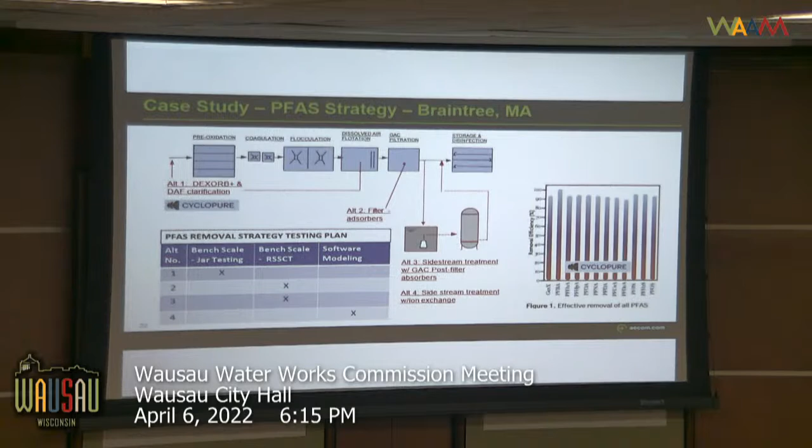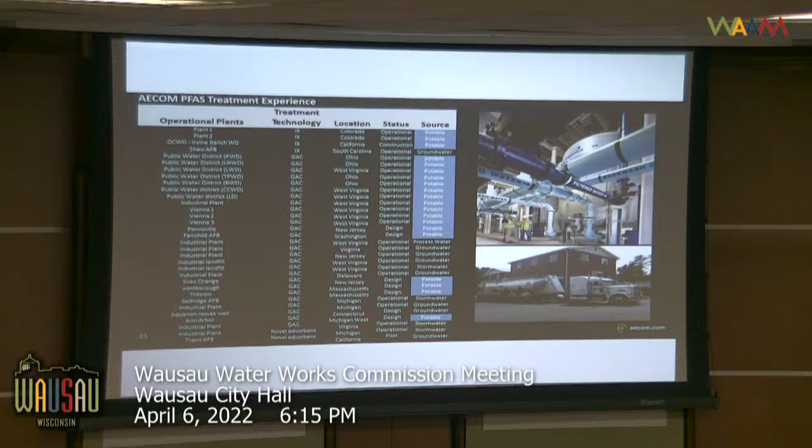This is our list of PFAS water treatment experience. You'll notice all the potable ones listed, so you can see the number of projects that we have. I know Chris has been involved in at least a dozen, and some of the other folks, I know Tim White and a few other folks in AECOM, have been involved in the others.

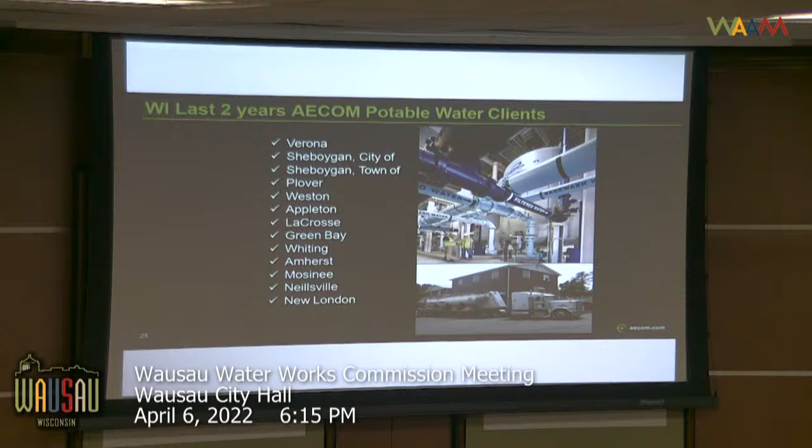Past 2 years, specifically for me, these are my potable water clients I've had. That's up there just so you can understand that we're engaged in the industry in Wisconsin, and that we understand drinking water and the regulatory environment with DNR, PSC, and whatnot.

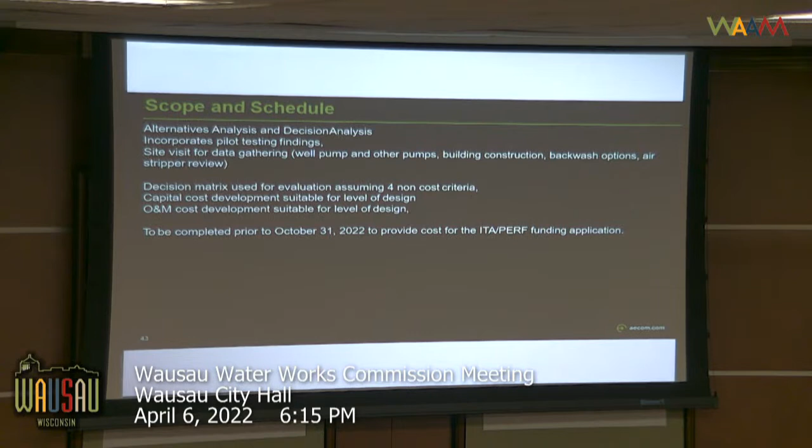And just to mention, we know you have a timeframe for submittals; alternatives analysis and decision matrix items are noted. So just wanted to mention again our support. We do have the communications plan, and we recognize, following up at the end, we have a lot of great national leaders that we can research and add to, that we can reach out to and bring to bear on our projects. And with that, I say thank you and see if you have any questions.

Thank you very much. Any questions? Yeah, Mr. Force. The defluoro processor product that you mentioned, is that an exchange resin?

No, unfortunately not. Let me see if I can go back here. So defluoro - some people talk about destruction-type products. Defluoro is what I call kind of like a plating process where you take two plates, put electricity to them, and basically electrocharge that water, and it actually takes those carbon-fluorine bonds and breaks them apart. Very, very energy intensive. So what we'd use that for would be like landfill leachate, or if you were to regenerate an ion exchange resin and really concentrate it down, you'd use that technology. I bring it up because some people are interested in knowing that's available, and that's some of the research directions things are going. But really, it's not applicable for these sorts of projects. Ion exchange resin, you're looking at a number of products that are already out there. But defluoro would be more for the other side of things, taking care of a very concentrated waste stream.